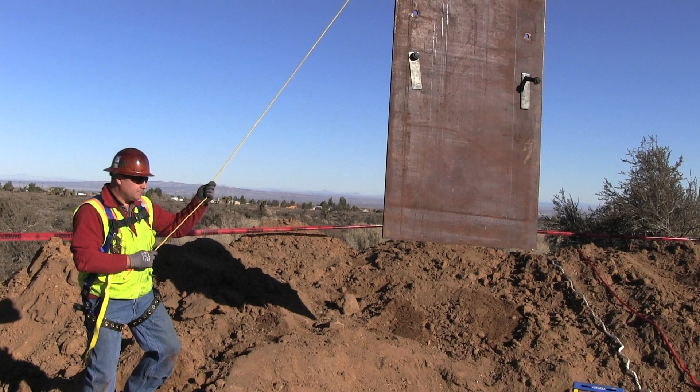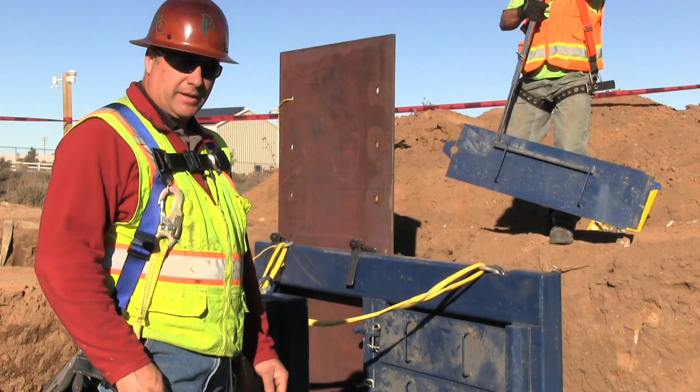Now that we have the box installed around the existing utility, John's going to install the interior panels around the utilities and safe off the hole so that we can go in and start our work.

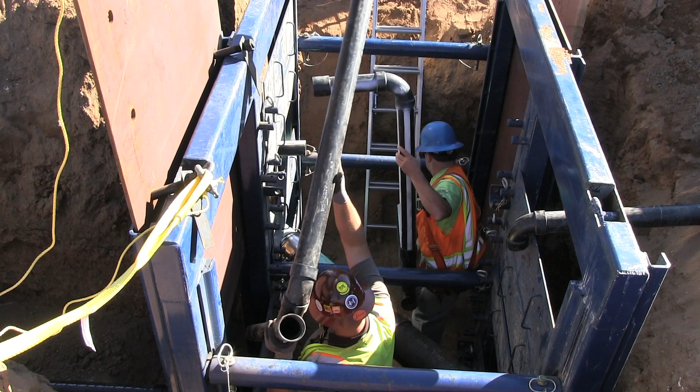I heard Andy talk about the flexibility of the TayMurph shoring system, how it can overcome and adapt all the safety situations that we've encountered on our projects for years. I'm here to talk about how it's going to save you money as well as keep your crews safer.

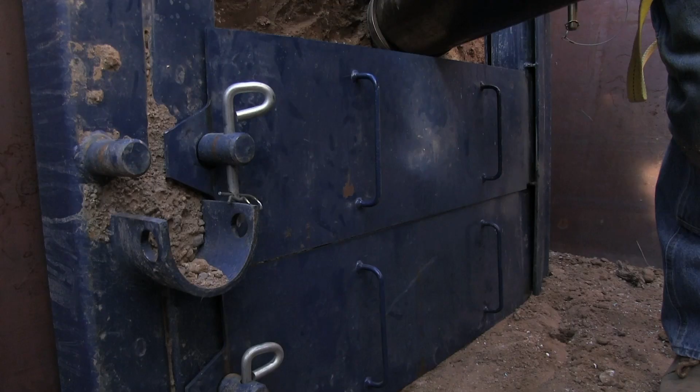So first let me talk about the crossing utilities. Every time you're on a project that has excavation, you're going to have some kind of crossing utilities. Whether you know about it or if it's an unforeseen condition, it's going to cost you time and money. With the TayMurph system, you don't have to wait for the safety manager to tell you that it's okay to go in that ditch. Your backhoe isn't waiting, your crews aren't waiting.

You save 4 to 6 hours per man and per machine to make sure this works. From what we've seen on the projects, that's going to save you about $2,000 every time you get that crossing utility. Next, I'd like to talk about points of connection to existing buildings.

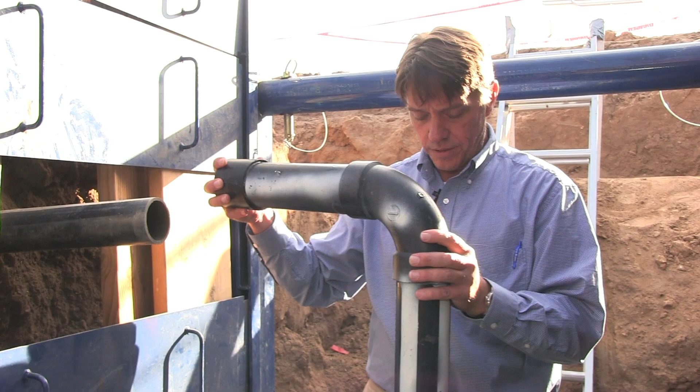Normally, with the current solid shields that we use, you'd have to cut this back, install your riser, test your new system, backfill, then come back, re-excavate down to your point of connection, and retest, then re-backfill. So with the TayMurph system, all you have to do is pop open the door, your point of connection is here, make your riser connection, you have one test, one excavation, one backfill, you're done.

This saves time with your backhoe, saves time with all your crews. You're not waiting around for the inspector on his second time to make this inspection so you can get off your job. You're done. Now we're going to talk about offsetting laterals.

Same with the point of connection, you're going to save time and money every time you have this situation. With the crossing utility in here, what you would have to do to make this ditch safe, put in plywood and hydraulic jacks across the ditch, which gives you about 2 feet to work. With the Tamer system, you have 4 feet. You have more room to be more productive.

Same with the point of connection also, you would have to install this riser, test your system, get it inspected, backfill, come back with another crew, re-excavate to depth, make your connection, retest the system, wait for the inspector to come back on the next day before you could finish and backfill and get done with your project.

One of the hardest and least productive items that we come across on a project is making a 90-degree turn at depth. With the solid-sided boxes, you'd have to stop here, test your system, backfill, wait for this side of the ditch to get opened up before your crews can get back in and safely work.

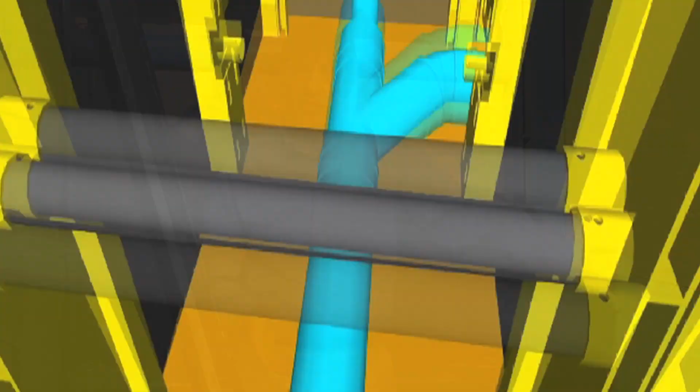With the Tamer system, all you have to do is pop the panel. Once that ditch is safe and shored, you raise up the exterior panel, your crews keep working. You save time and money with one test, one inspection, one backfill.

On a lot of our projects we encounter duct banks, electrical conduits surrounded by concrete. These can be up to 4 feet tall and just as wide. Currently, you'd have to use plywood and shoring jacks to get around those, and you're never shored underneath them. So you're unsafe underneath those duct banks.

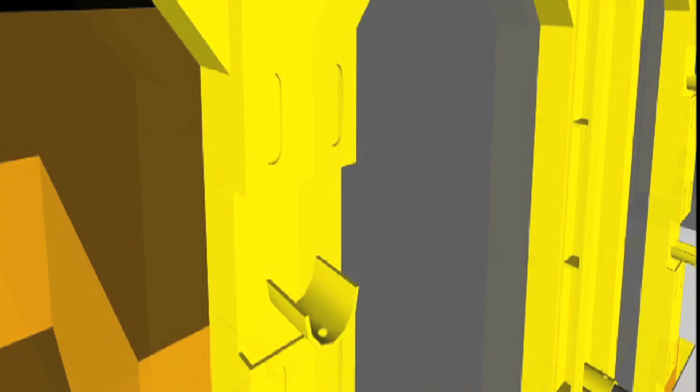With the Tamer system, you can take out 1 door, 2 doors, 3 doors, however many you need to get around and surround that duct bank. Then you can shore underneath it. Your crews work safely, they work efficiently.

We've shown a plumbing system here because we're plumbers and that's what we understand. But this is a broad scope box. It can be used by multiple contractors. Whoever digs in the dirt can use this system.

Imagine this is a 4-sided box and you're an electrical contractor trying to get into your vault. You have all of this adaptability to make sure your points of connection come in a convenient way to bend your conduit. Or communications contractors.

Granted, it's not going to be that deep, but you have this ability to come in here, make your splices in a safe, efficient environment without running the risk of cutting hundreds of phone lines, taking down people's internet connection, and upsetting and losing clients.

Another contractor that can use the Tamer system are waterproofers. When they come in to waterproof the foundation of a building, they would have put shoring jacks against the foundation, shored up against plywood on the other side. They'd paint the foundation, come back the next day, move the shoring jacks, and reapply the waterproofing.

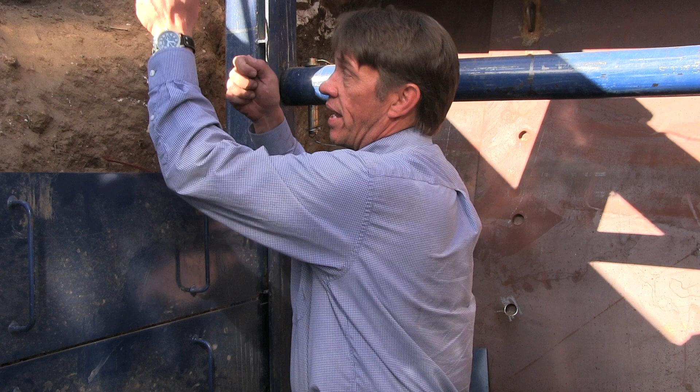Since the Tamer system is a standalone box, doesn't touch the side of the building, they can come in with all of this area open, staying shored behind them, and apply all their waterproofing at one time. They don't have to come back, they save time and money.

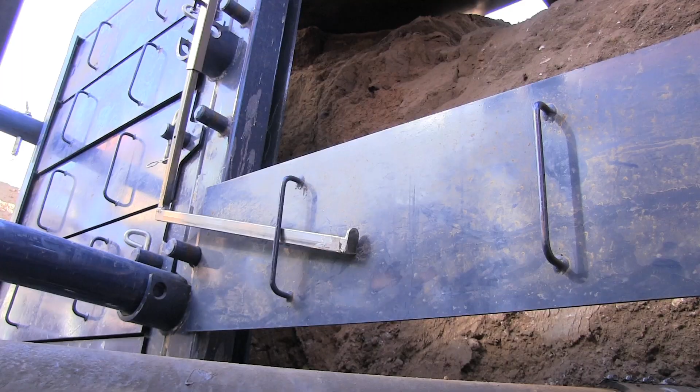Again, the Tamer system is a broad scope shield. Think about all the different industries that could use this. Look at refineries with all the systems that run in and out and all over those places. Plus there's strict shoring regulations that they make their contractors adhere to.

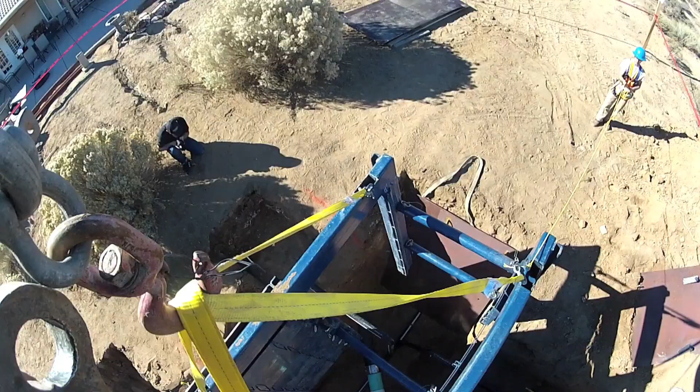Look at theme parks. They have all those live systems that they have to keep online to keep their guests happy and coming back. Look at city street installations. They open up the road, they drop this Tamer system in, and they can adapt to whatever's down there because nobody knows.

Look at deep civil excavations where they get down 16, 18, 20 feet in the dirt and they're pulling big shoring boxes underneath the crossing utilities and doing the best they can to shore up above them. With this, they drop the Tamer system down around those crossing utilities, pin it to their shield, they keep on going, they keep on moving, and they do it safely. You don't have to wait to be safe.